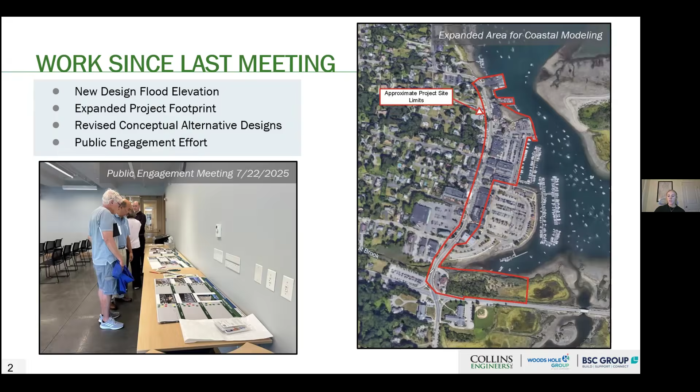So now that we've got these different design flood elevations, we've gone and revised our conceptual alternative designs, which I'll share today. We also had a public engagement effort, which went really well — we were able to get a lot of great feedback from the local community, and we're really able to understand what their priorities were. So I wanted to talk about some of the coastal flood pathways, because this is a key driving factor in terms of how the project has been progressing.

There's a lot of information on this slide. I'm going to hopefully simplify it for you, but originally we had proposed the design flood elevation — remember, that's the elevation we'd bring the edge of the harbor up to in order to provide protection against a storm scenario. So we were protecting against a 2070, 100-year storm event. This is a storm that statistically happens once every 100 years, and it takes into account the sea level rise we'd see in 2070.

This black line all around the perimeter of the site is essentially where our flood protection structure would go — that's the limit of where our site starts and ends. You can tell we're not touching anything further to the west, north, or south. These red dots are elevations all across the site. Keep in mind Cole Parkway is shaped almost like a bowl, so we have low-lying points towards the middle of the parking lot in this area, but as we look at other portions of the site, the boat ramp is only about elevation 6.9.

Up near Old Dock Street, that's only about 6.5. So these are already low-lying areas, and if we were to install our flood protection at elevation 12, it would be a pretty significant increase. But again, that would be ineffective as a standalone project. Some of the other elevations surrounding our site that are outside of the limits — looking to the north, we have elevation 8.7 and 9.5. To the south, we have 9.2.

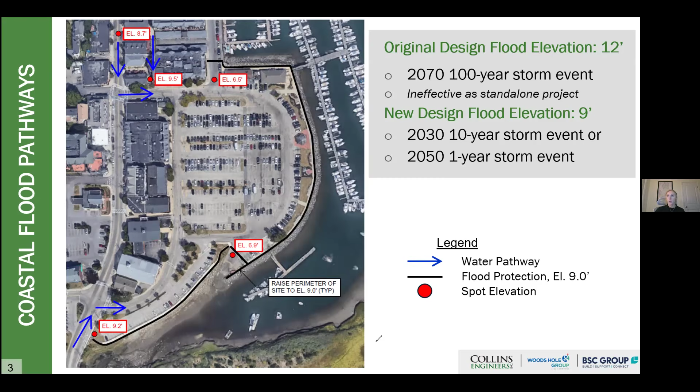So I want to share some of the proposed designs, keeping this in mind. I'm going to show a couple of engineering plans, and then some 3D renderings as well, which should give more perspective and be a little easier to understand. I'm going to summarize some of the key improvements — this isn't everything, given the time constraint, but some of the big picture items.

Starting off, we're proposing to raise the parking lot up to about elevation 8.5 or so. Right now Cole Parkway, at its lowest point, is about elevation 6; otherwise it's usually around elevation 7. So it's not a ton of fill we're bringing in, but it's enough to allow us to raise up some of the catch basins and drainage infrastructure at the site.

That will help with some of the backflow issues we've seen with coastal floodwaters coming through during high tide scenarios, which sort of bubble up through the parking lot. So by raising the grade of the parking lot, we'll be able to combat some of those adverse effects.

This raising of the parking lot will be consistent across all the alternatives I'm going to show today. In addition, at the southern portion of the site, the purple lines represent sidewalk improvements — we've got some on the western side, the northern side, but on the southern side we're proposing to raise the sidewalk up to elevation 9, which will serve as coastal flood protection and also provide flooding protection for the southern portion of the parking lot.

We're going to be resurfacing the boat ramp and grading it up to try to fix some of the pavement concerns we've seen there. On this alternative, we're actually expanding parking across the parking lot — we've got a few additional spaces proposed down at the southern end, and a couple spaces at the northern portion of the site. This is the only option where we're actually able to expand the parking scenario we've been looking into.

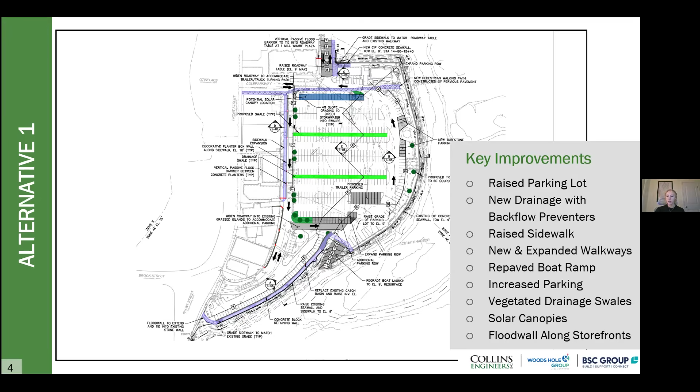That's alternative one. Alternative two we separated into 2A and 2B because they're very similar—the main changes are in the green space improvements. On 2A, we keep the same improvements as before on the southern portion of the site: the raised walkway, resurfacing the boat ramp, and raising the grade of Cole Parkway to about elevation 8.5, which allows us to incorporate raised catch basins and stop the adverse reaction of floodwaters coming up through them. But the biggest improvement here is this centralized walkway, which serves as a pedestrian improvement, provides green space and vegetation, and is also a drainage infrastructure improvement that can capture and treat stormwater, meeting improved water quality requirements and adding more green space at Cole Parkway.

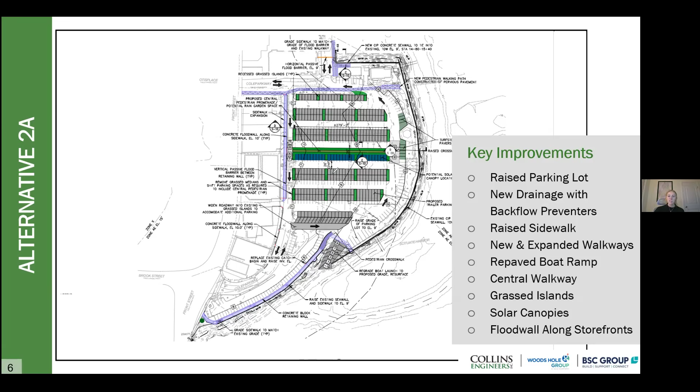We've also got some parking islands proposed here—additional grassed areas to break up the expanse of pavement. And again, incorporating those flood walls on the western side of the site, plus some sidewalk improvements. So there are similarities, but that centralized walkway is really the key difference on this option.

2B maintains roughly the same parking configuration as 2A in the central portion of the site. However, the big change is down at the southern end, where we're proposing to reconfigure the Front Street entrance—pulling it a bit further in. We're removing some parking here, but still incorporating some parking as angled spaces, while including this enhanced, expanded green space.

We've got a restored wetland, and a boardwalk that comes all the way through the site here—a lot of really nice pedestrian amenities at this location.

On this option, we're also proposing to extend the boat ramp and resurface it, providing additional access for recreational boaters with trailered vessels. Right now the boat ramp is in a little bit of rough shape—it doesn't go all the way down to mean low water, so its use is really restricted by the tides. Under this option, we're able to provide access during all tidal scenarios, which will benefit recreational boaters.

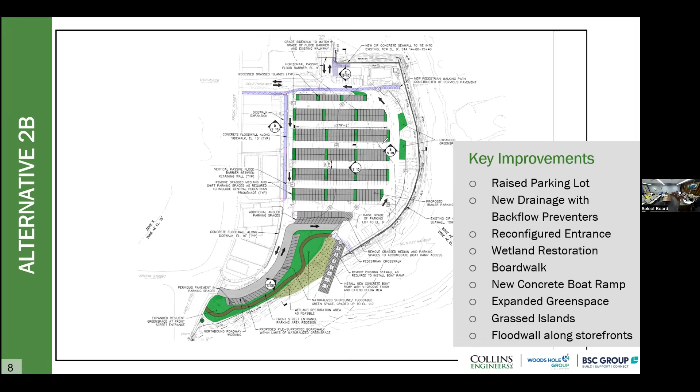On this option, we're still raising the site, still incorporating catch basin improvements, and still have flood wall protection along the western side of the site. This is similar to the last option, though we don't have any solar canopies here. You can see the boardwalk that comes all the way around the southern perimeter of the site, providing great green space improvements, great wetland vegetation, and a really nice pedestrian experience at the southern end of the site.

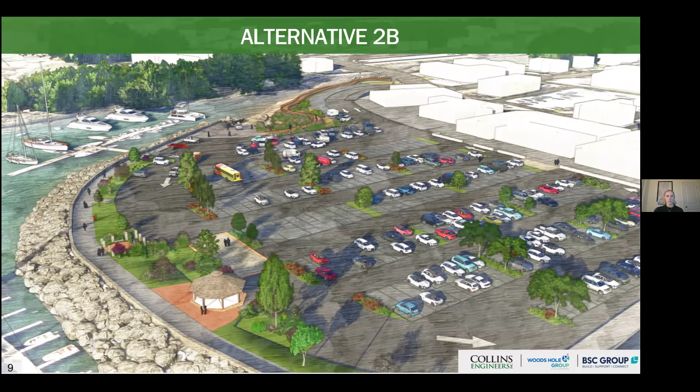Another thing I wanted to touch on, which was a key driving factor as we developed these alternatives, is the public feedback we received from the local community. We had a public engagement effort, and it was essentially threefold.

We had an online survey which provided a lot of great information, asking people about their preferences for certain design elements. We had about 300 respondents, so a lot of great feedback. We also had a public meeting back in July with a great turnout, probably 50 people or so, and we had poster boards available where people could fill out their preferences for the design elements we presented.

I do want to present briefly on some of the feedback we received from the survey, because that provided a lot of really good quantitative metrics that we could use as we develop these alternatives.

As I presented, alternatives 2A and 2B had the pedestrian walkway through the middle of the site, and the green space and boardwalk improvements at the southern end on 2A and 2B respectively. Those two options really tried to take into consideration these priority features mentioned in the survey.

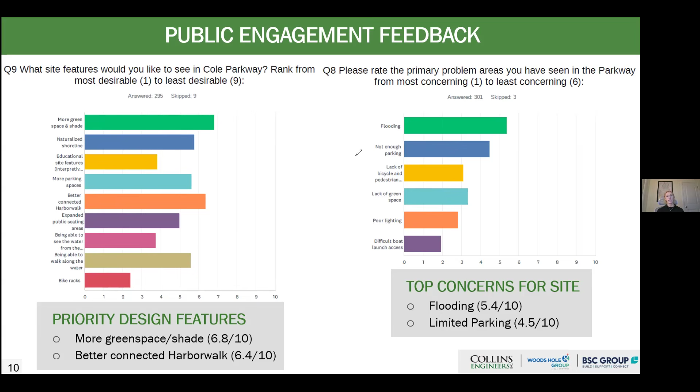We look at the alternatives in terms of the most important things to consider when selecting a preferred alternative to continue the design with, things like cost, the impact on parking spaces, permitting and maintenance, as well as community priorities like added green space and the pedestrian experience.

On the other end of the spectrum, 2B is the most expensive and has the most impact on reducing parking at Cole Parkway, but it also has great benefits in terms of adding green space and vegetation and improving the pedestrian experience. So that's where we're at right now on the project.

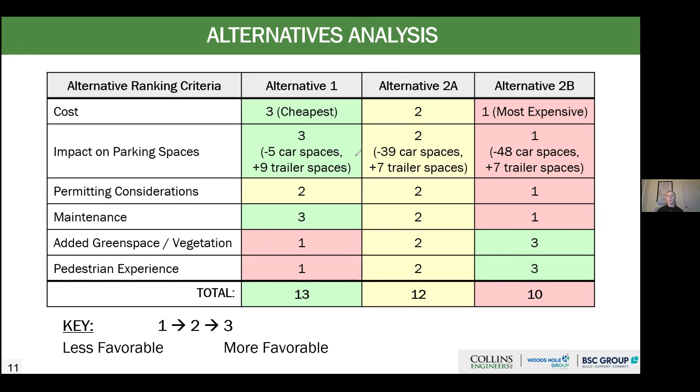We're currently working with our subconsultants on developing a much more robust alternative ranking system to provide to the town. We're going to have another public engagement session to share these alternatives and renderings with the community, showing how we've incorporated their feedback into these options. That's where the project stands right now.